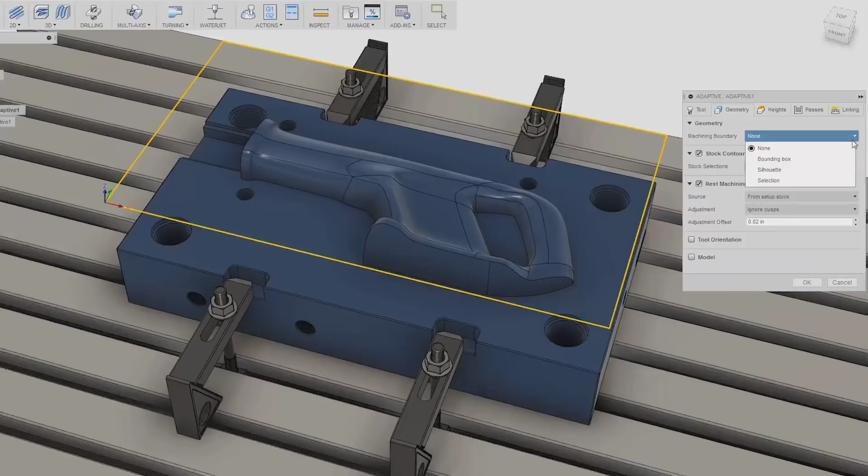Under Geometry, I can set a machining boundary using one of three options. A bounding box makes a rectangle that contains the entire model, a silhouette is a projection of the outer contour of the part, or a selection that I can pick directly off the geometry.

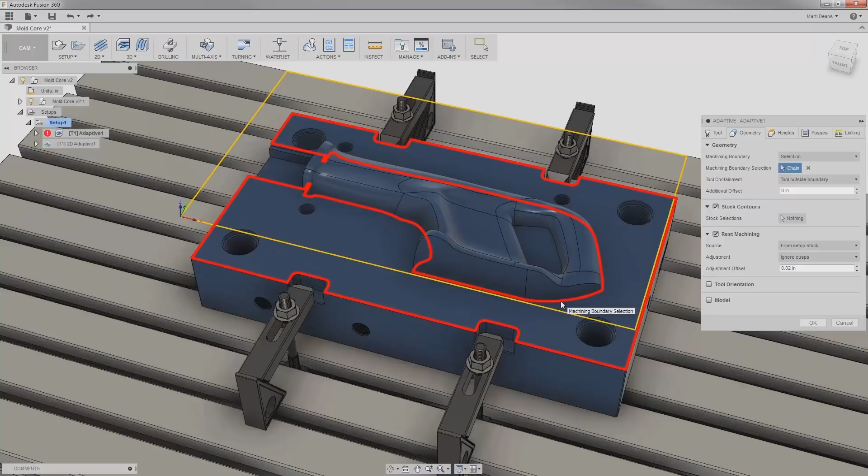I'm going to switch gears briefly into contour selection, which is key throughout the CAM workspace. When I'm picking my contour, Fusion tries to guess what I want, but in this selection, the machining boundary isn't including the saw, which is what I actually want to rough out, so I need to edit this contour a little. I'll click on it again and I enter Contour Editing Mode, which contains 5 commands.

The first 2 are to open or close the contour, which isn't currently an option because machining boundaries need to be closed. Then I have Accept, which will save the contour with any changes that I make, Cancel, which will keep the contour selected but not save any changes, and Delete, which will unselect the entire contour.

The portions of the contour are also colored blue and black, where blue indicates a portion that I have selected, and black indicates where Fusion tried to fill in the blanks. I can edit the contour by adding or removing selections, and Fusion will update its automatic selections. I'll click Accept, and now I've saved the edited contour.

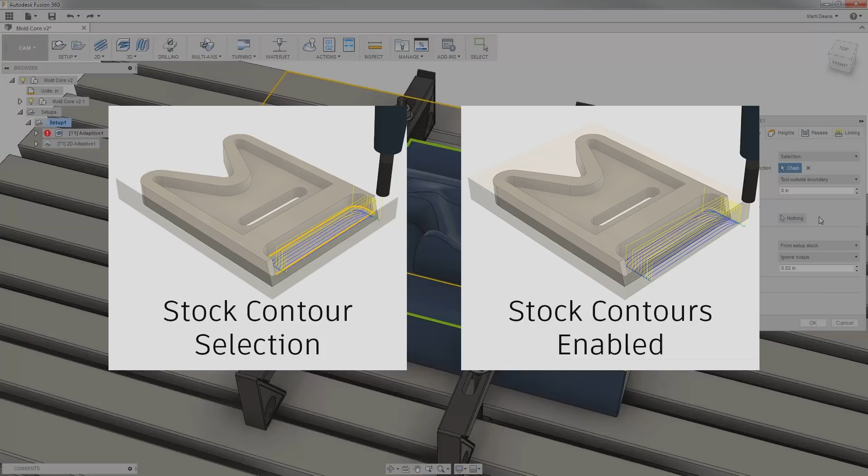Back to the Geometry tab, the next thing is Stock Contours, which lets Fusion know where the stock begins and trims or lengthens the toolpath appropriately so that there's less time spent cutting air where there's no stock. I can make a contour selection just like in the machining boundary, or if I have nothing selected, it uses the silhouette of the stock defined in the setup, which is the yellow rectangle I see now.

Rest machining enables Fusion to calculate a toolpath that takes into account what stock has already been removed by looking at the setup stock or the result of previous operations, which also helps reduce time cutting air. Tool orientation is available in Fusion Ultimate and allows me to do positional 4 or 5-axis machining by defining a different work coordinate system for this operation.

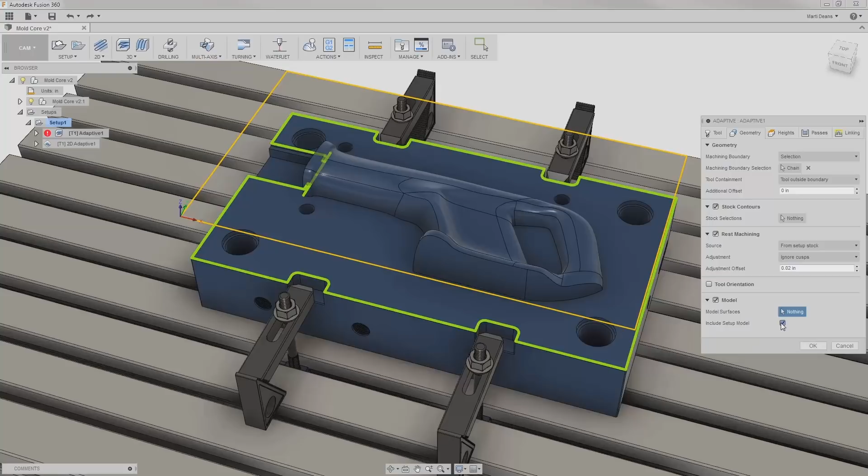Model allows me to override or add to the model I defined in the setup. I can select surfaces or bodies to be included in the model for toolpath calculation, and if I uncheck Include Setup Model, then my selections will be the only objects used in toolpath calculation.

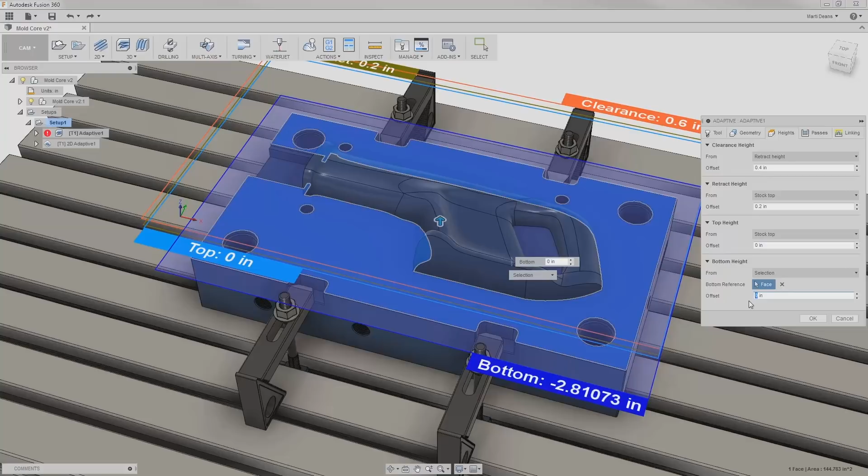Next for heights, each height is defined based on a reference, which can be one of the other heights, the model top or bottom, the stock top or bottom, or a selection which I can choose directly off of any geometry in the workspace. Then I can define an offset value from that reference. I can also set heights a little more quick and dirty by grabbing the plane and dragging it to wherever looks good.

In the Passes tab, there is a lot going on, and this is a good time to remind myself that if I ever forget what something is, I can hover over the parameter and see a tooltip that explains it.

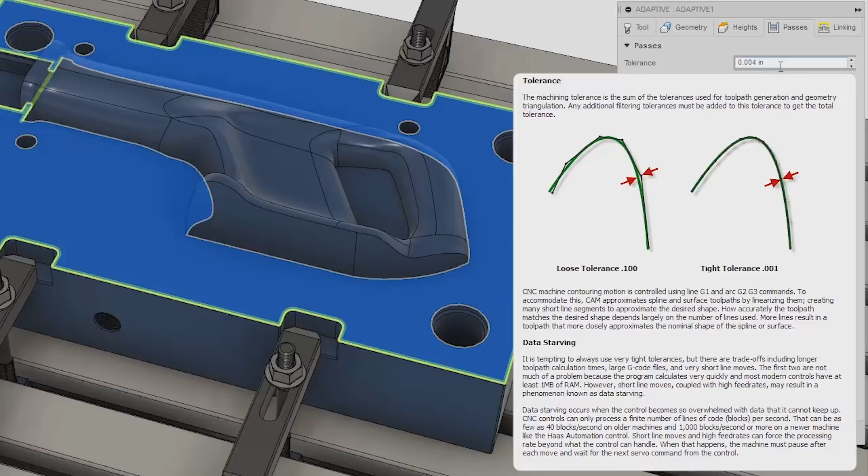Starting from the top, the tolerance is going to set how tightly the toolpath fits the model geometry. Enabling shallow areas adds finer step-downs on shallow parts of the model to machine them more accurately. Optimal load sets the optimal engagement for the tool, similar to the step-over in a legacy clearing toolpath, but instead of basic offset passes, this enables the algorithm to keep the same load on the tool throughout the toolpath without over or underloading the tool.

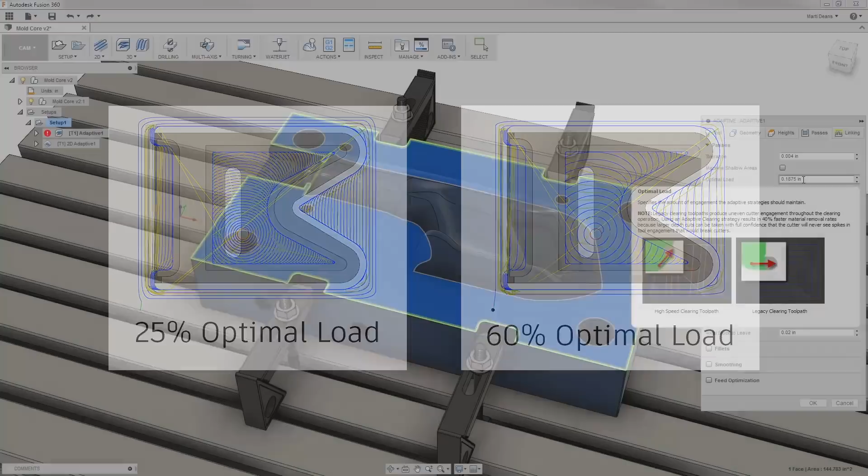The minimum cutting radius is the parameter that keeps the tool from getting put into a corner where a high portion of the tool would be engaged. I can decrease this to allow the tool into smaller areas. Machine cavities allows the tool to go into closed pockets. If this is disabled, the toolpath will only machine areas that can be reached from the outside of the part. Slot clearing clears out the center of the slot and then does offset passes rather than the typical adaptive trochoidal style passes.

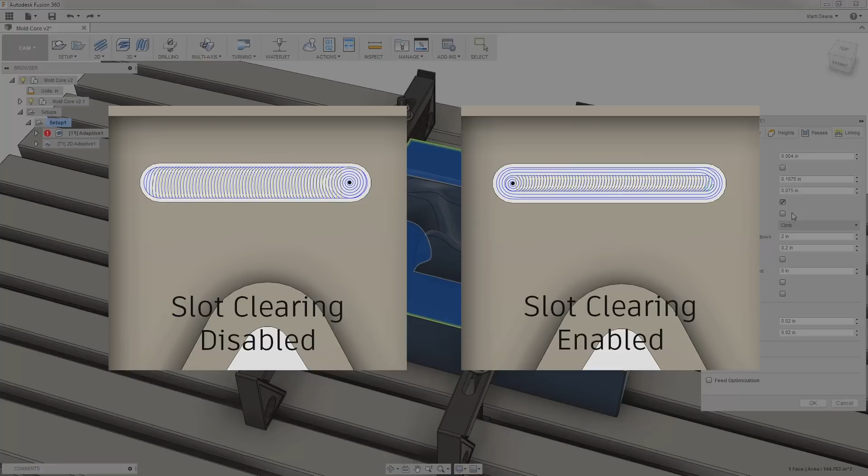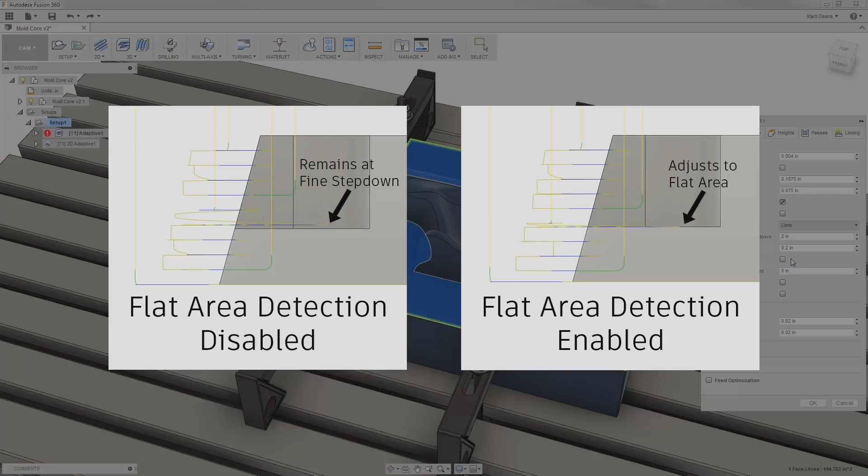The maximum roughing step-down defines the biggest step adaptive clearing will take, and the fine step-down defines the small step-up passes that come after the first large step-down. Flat area detection finds flat areas on the part and tweaks the step-down parameters slightly to cut right at those depths.

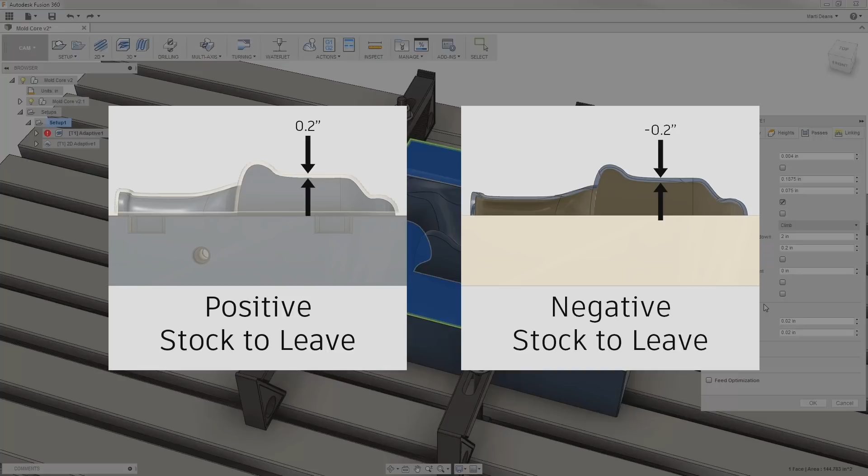Stock to leave will leave some material behind in the specified direction, so there is something to remove in semi-finishing and finishing passes. I can also enter a negative value here to have the toolpath remove slightly more material than what's defined by the model. Stock to leave appears in nearly every operation, so it's easy to make features over or under size if needed. Smoothing will fit lines and arcs to the generated curves and can significantly reduce the amount of code that feeds into the controller.

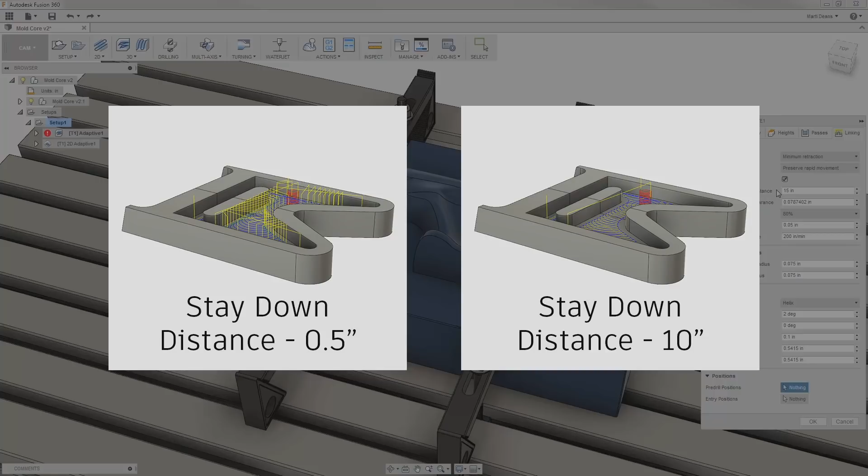Moving on to the linking tab, I'll go deeper into the stay-down parameters. The first parameter, maximum stay-down distance, is the longest path length that any stay-down move will make. The larger the amount entered here, the longer the stay-down moves are allowed to be. Stay-down clearance is the smallest radial distance allowed from the tool to any obstacles. The stay-down level I like to think of as a calculation timeout. The higher the stay-down level, the longer the calculation time Fusion will allow, resulting in more stay-down moves.

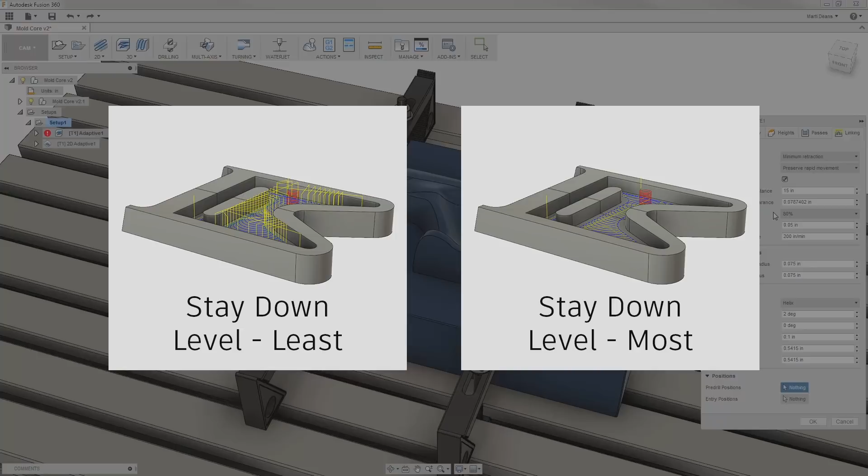Lift height will lift the tool off the material while executing the stay-down move. Finally, no engagement feed rate is where the stay-down moves can really save time if I enter a high feed. I usually go for at least my cutting feed rate, if not something closer to the rapid feed of my machine, so that the reduced distance saves me time. Those are all of the adaptive clearing specific parameters that really need additional explanation.

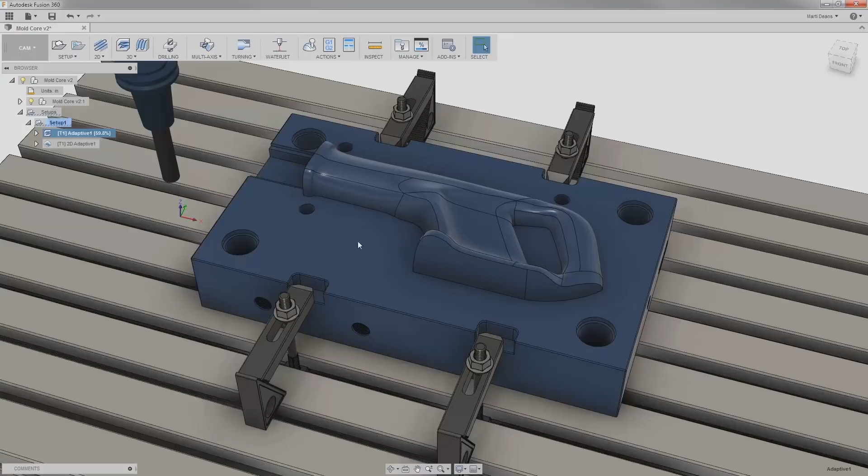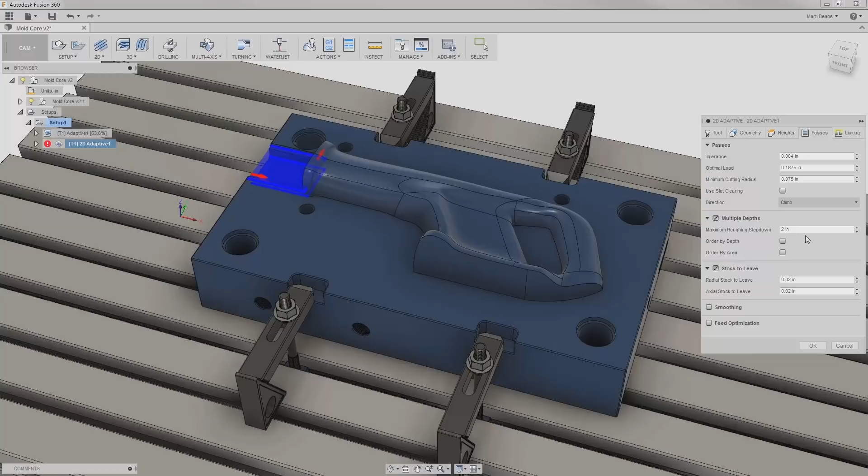These parameters largely carry over to 2D adaptive clearing as well, but there are some key differences that I'll go through in this existing 2D adaptive. First is that I need to select the geometry I want to clear out. I can do so by selecting faces or contours of pockets, but I recommend selecting contours as this gives extra control with the contour editor. The second difference is under the Passes tab. There are no automatic step-downs. I can enable multiple depths to set a step-down length, but there's no fine step-down because 2D Adaptive doesn't recognize surfaces to apply them. That was an in-depth look at 2D and 3D adaptive clearing.